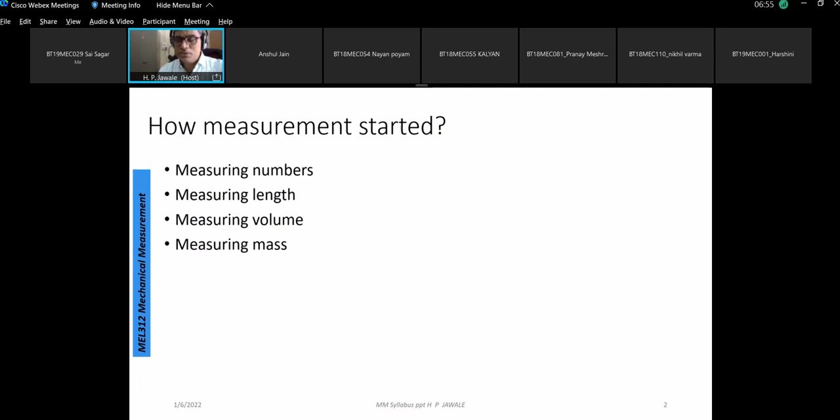Then this way, we found that we have started using measurement. It was a need of time that without measurement we could not proceed further for knowing the contents of a system. Then we slowly started measuring area - area of our farm, area of a particular land, area of elements like paper, area of a table. So slowly we moved further.

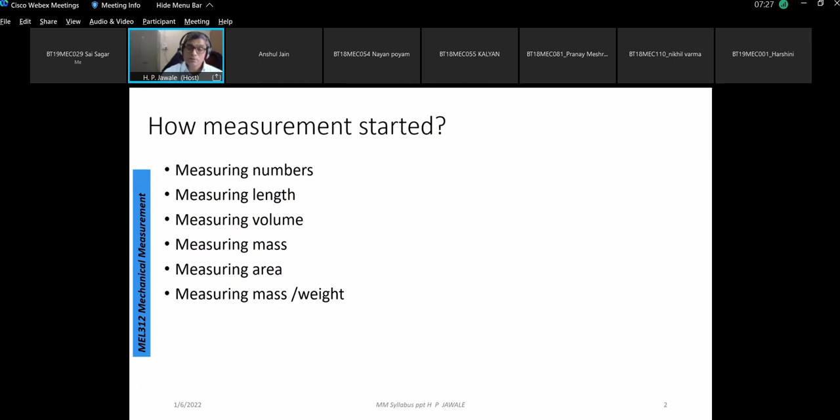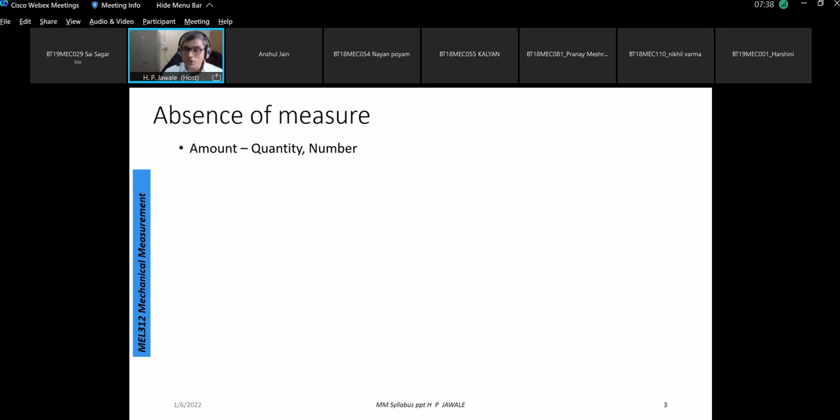Science of measurement has a long history. Then we started measuring mass and weight. Now in this way, when we have started measurement, we can find what will happen if there is no measurement possible. We will not be able to quantify. We will not be able to give something in terms of number. So we will not be able to say that it is a 5 number.

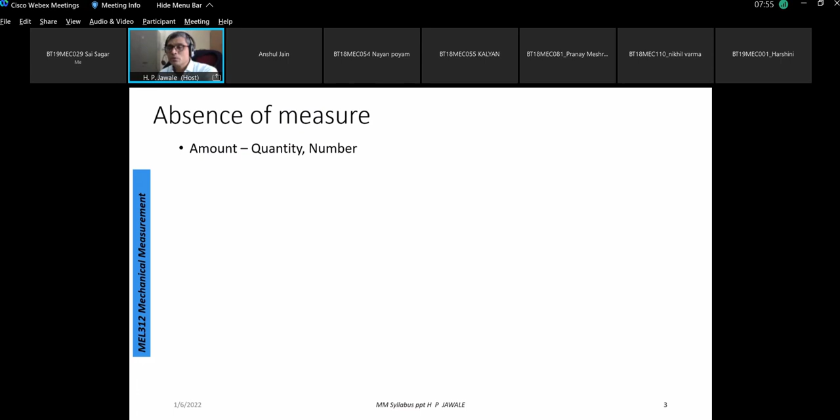There are 80 students in 2 classes. So we can just imagine that without measurement, or in the absence of measurement, we will not be able to quantify. We will not be able to assign numbers to an entity. So without amount and measure, we will not come to know what is the status of the system.

The very first slide we discussed was a very general slide. It had some background of history long back, before there were standards established. But now, as of today, we have calibrated standards available with very fixed units for measurement. So if we don't have measurement of a mechanical system property, we won't be able to

quantify what is the temperature of the filament. Then we'll have to express that the filament is hot or cold. We'll have to express that voltage is high or low. We'll have to say that the pressure measurement device is for low pressure or high pressure. So there will be some low, high - just qualitative measurement of entities. Whereas now we must know the quantity. Quantitative measurement is required.

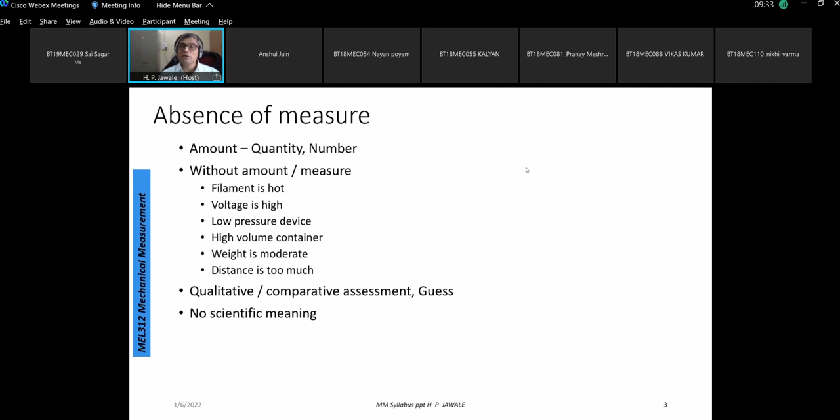So actually we would get the assessment by guess only, if there is no measurement. The meaning will be lost - there will be no scientific meaning to the entities. If I say the filament is hot or cold, it will have no scientific meaning. It will just be layman's language, like saying today is too cold or too hot. It will have no meaning, especially in terms of science, engineering and technology, for controlling different processes and elements.

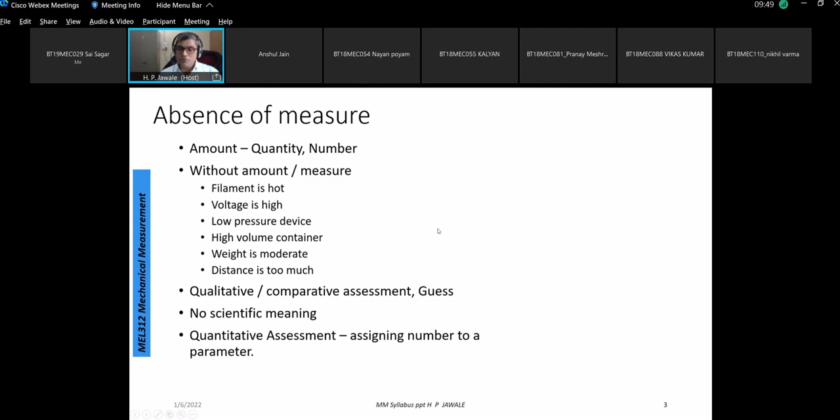So the quantitative assessment of an entity is very important, very essential - it assigns a number to the parameter. So what is measurement? We discussed earlier that measurement is nothing but a process. What we have done is compare - for example, the distance traveled by a person. He will measure that in terms of feet, distance 5 feet or 5 arm lengths, like that. It is the act of comparing. We have an entity to measure, and then we compare.

For example, there is ice.

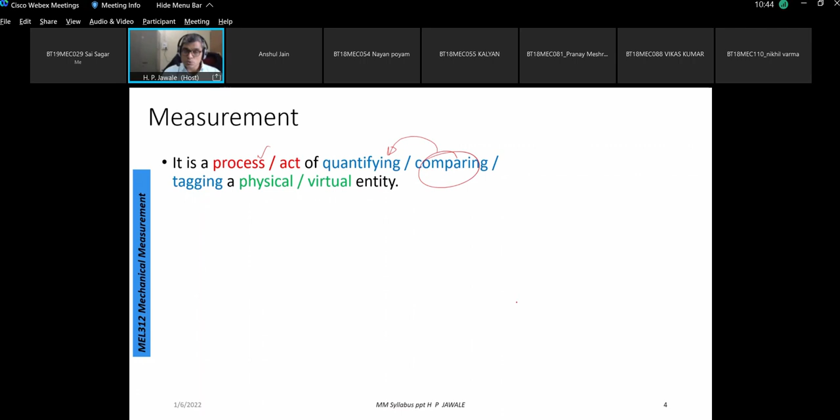We will say that the temperature is very near to the temperature of ice. What is that? It is nothing but a process or act of comparing. So we are going to compare this. It is a process of comparing, and more scientifically we can call it quantifying. We are quantifying in terms of number, so there is some value, which is very important. Tagging a physical or virtual entity, that is value. Assigning value is important. So what we have done is compare, and we have assigned some value to it.

The distance is 5 feet distance. Distance is 10 arm or 10 hand distance. The diameter of the board, the diameter of the well is say 10 hand, or depth is say 10 feet depth. A very rough unit, may be rough, but what we have done remains the same from age long. We are going to compare. We are going to have the entity being tagged with the numbers.

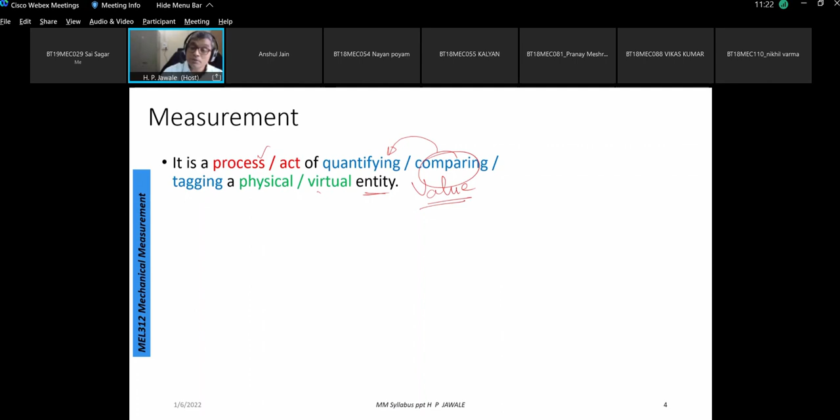So this entity can be a physical object. For example, there are now 117 students in the class. So what I have done is assigned the number 117. As of right now, the number of students or participants present in the meeting is 117. So the same thing can be very scientifically told, it can be any entity. For example, number of electrons in an atom.

The entity can next be the property. So what are the different properties of material? We have got yield strength, we have got tensile strength, we have got Young's modulus. There are different elements, different properties which we are going to define. Say temperature is there, pressure, volume, and so on. So there can be a number of properties there.

Or more specifically, in today's context, we have the process parameters. Many of the processes are to be controlled. For example, there is a flow of water into the boiler, say 1000 cubic meters per hour. Some unit is assigned as a scientific measurement for the process parameter. Say the amount of fuel consumed by a particular boiler, or by your two-wheeler or four-wheeler, in terms of liters per kilometer or something. So it is nothing but the process of combustion of the fuel or obtaining power. So what we have done is define that.

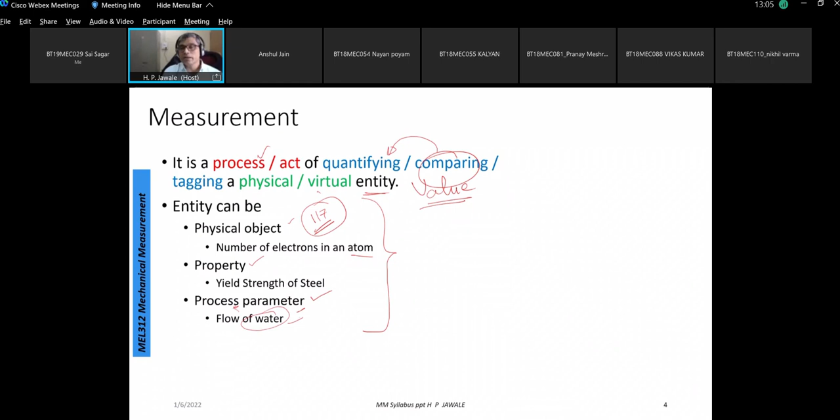So the status of the measurement - for example, if you consider any scientific phenomena in science, we find that it has progressed because of measurement. More and more accurate measurements are possible for time, length, distances, mass, and so on. Because of this progress in science, we are able to measure everything correctly, even the distance between two stars or the difference between two elements in space. So all the laws which are established in scientific phenomena involve some numerical parameters, and those are well supported by means of measurement.

There are various measurement methods, various measurement instruments that we have generated or created. So all the laws that are established have involved various parameters. You can take the example of your IC engine. Suppose you want to conduct a test, you have to go for different measurements. So all kinds of measurement into the phenomena or the law which is there for combustion or so on, it has been established, and more accuracy is obtained through measurement.

So as measurement is improved or developed further, the science has advanced further, and we find more and more scientific laws are being tested, validated, and so on for better accuracy, better reliability, and so on.

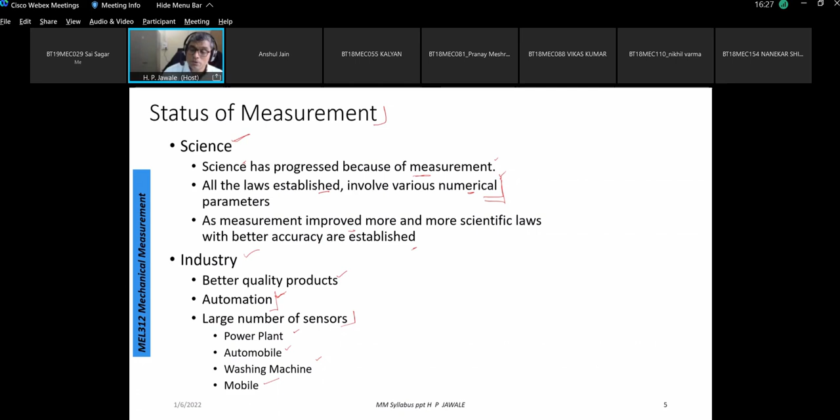Take the example of power plants, or your two-wheelers and four-wheelers. In the four-wheeler, you have got different sensors mounted, for example for opening of the airbag. Take the example of household elements like washing machines, food processors, refrigerators, televisions, and even mobiles, which have different sensors. These sensors help in taking measurements, which are used not only in scientific areas but also in industries.

So mechanical measurement is about measuring mechanical parameters. If you have heard of electrical measurement, there are different entities in electrical engineering which require measurement and accurate prediction of status. Similarly, in the mechanical domain, properties like displacement, velocity, acceleration, speed, force, torque, power, pressure, and so on are required to be measured, not only for knowing the state but also for helping control the processes further.

Instrumentation mainly deals with signal processing. It's not only the science where we tag the entity, but it's a complete system in which the status is made known, compared with some standard, and then assigned some number. Even that time-dependent assignment of the value is taken and used for further application. That is done through signal processing.

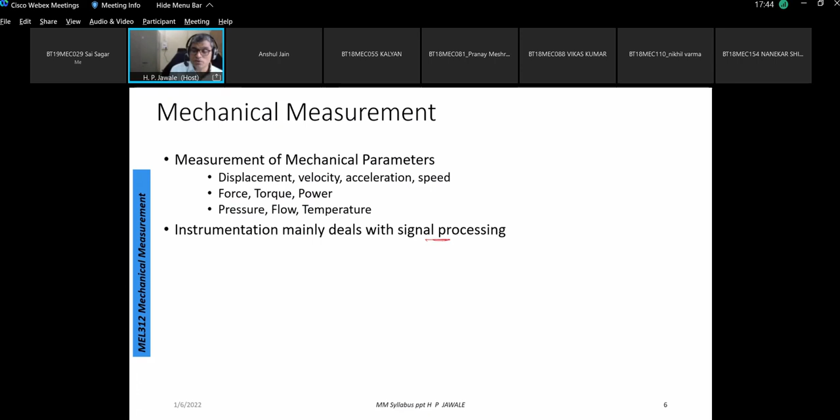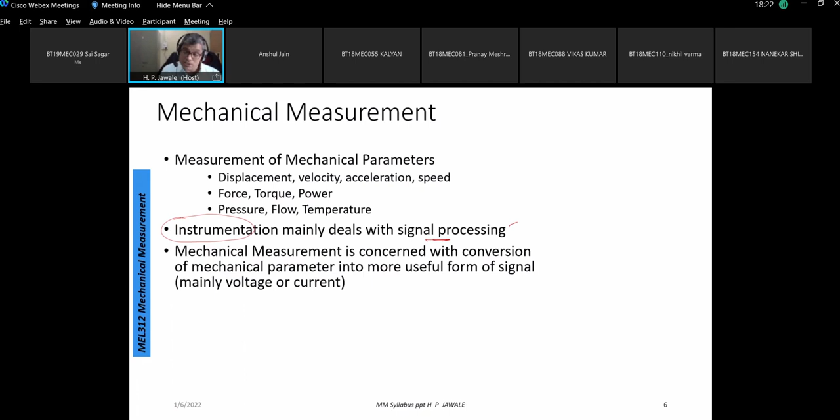We are going to process the signal because we will never get signals in the final usable format, so we need instruments for this. Instrumentation mainly deals with processing the signal and converting it into a useful format. Mechanical measurement is concerned with converting parameters used in the mechanical domain into a more useful form of signal, maybe voltage, current, or some other way that is easy to express in useful numbers.

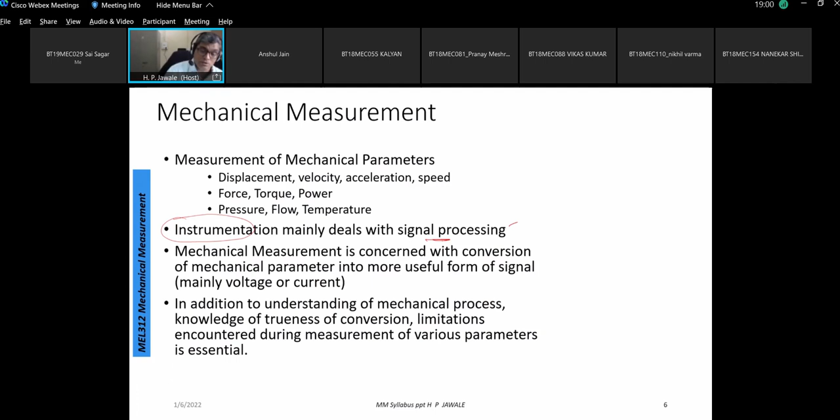In addition, we need to understand the mechanical processes. Knowledge of the trueness of converting one entity or one format of information to another is also important in the measurement of various parameters. So mechanical measurement takes care of properly understanding the mechanical process, how signals are converted from one form to another, and how those are converted into quantification, or how a number is tagged to a particular entity. So we need to learn that particular element.

So actually what we are going to learn in this subject is the fundamentals of instrumentation: what are the main components of the instrument, what are the main components of the measurement system, what is the overall mechanical measurement system, and what are the different parts and elements which make the structure of the instrument or the mechanical measurement system.

What are the important components in terms of the reliability of the conversion and reliability of the reading of the entity - that is nothing but accuracy analysis, or error analysis. Then we try to eliminate that error or maintain it within acceptable limits. So we actually go for errors and calibration of the instrument or mechanical measurement system. That is what we are going to see primarily in this subject.

We will only learn the fundamental principles, whereas this is a very vast domain with different components being developed, which are mainly of an interdisciplinary nature, involving different sensors from different domains like electronics, and even processing in terms of programming languages and other elements.

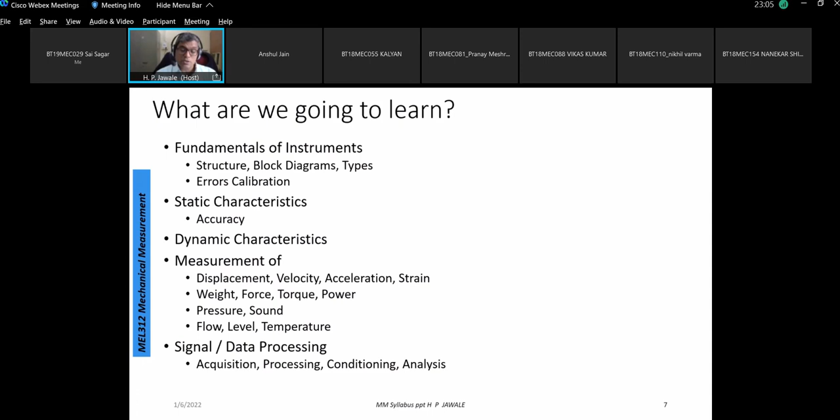Then the most important part of the mechanical measurement systems is signal processing. Earlier the name of this subject was measurements and signal processing, so we used to take this part prominently. But now the name of the subject has changed and the syllabus also is revised. We are very rarely going to deal with signal processing, but let us understand what is the importance of signal processing.

Say once the signal is obtained from some system, which is required for controlling the process, that needs to be further used for having some control. For example, we acquire the signal, we take the signals, we have the status of the system. Say temperature of some system is known, or within some confined boundary it is known. And if we find it has some comparison with the set standard, if it reaches above the set limit, then we need to do some action.

So for taking the action, we need to control the process with which that temperature is generated. So we need to acquire that information of the present status, for example temperature is an entity. Then after having it, we need to process it, convert it into the proper format, condition it. If there are some unwanted elements entered into the signal, we need to remove those, then analyze, further compare, and give some instruction for controlling the process. So signal and data processing becomes very, very important as far as process control is concerned.

Though we may not see this in this subject, you should understand that not only tagging or quantifying the system in terms of number is important, but also controlling the process is required, which is only achieved by having the signal and data processing. So we need to present that data then.

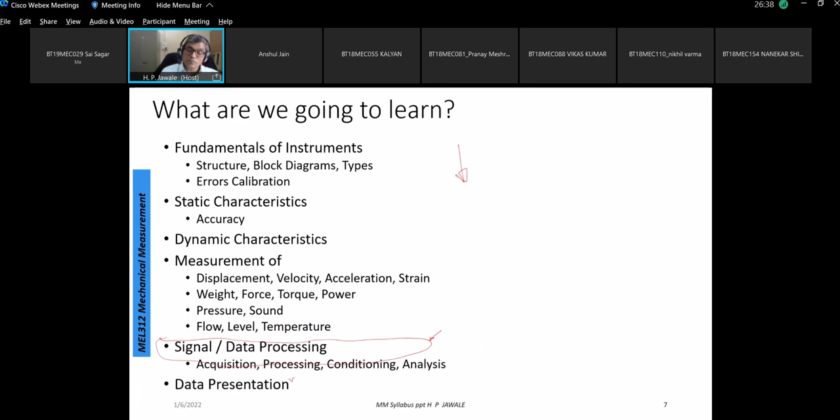So this is what we are going to learn in short. Let us discuss the syllabus. Part A of the syllabus that I will be dealing with...

is about the general principles of the measurement system, why the systems and how the systems are going to work, how the performance of the measurement system is achieved, and what are the different parameters for performance of the mechanical measurement system that we are going to study.

Then we are also going to see the structure. What is the measurement system? What are the various different elements into the measurement systems? What are the different examples of the measurement system? And the basic block diagram of a system.

Then we are going to find the characteristics of the measurement system, especially the static characteristics. We will identify the different static characteristics, see the definitions, see how those can be achieved, and some numerical part will also be there, which is going to lead to establishment of certain acceptable standards.

That is nothing but calibration. So we are also going to learn what calibration is, how it is done, why it is done, and how that is maintained after periodic usage of the instrument, how we are going to calibrate that.

Then some basics regarding the dynamic characteristics of the system, response of the system to different dynamic situations. Then the errors, the deviation of the system from the ideal or desired performance level to something that, because of different sources, we find is going to degrade.

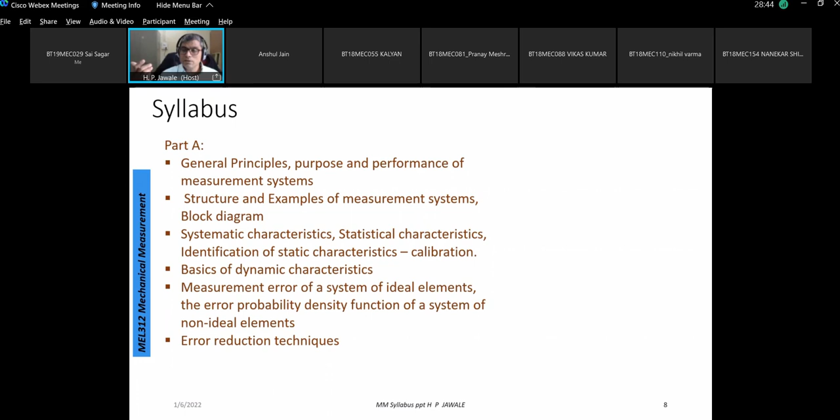So the measurement system errors - we are going to study what are the different kinds of error, what are the different reasons for these errors, and how those can be eliminated. So the ideal elements in error, the probability density function of the system for non-ideal elements, and what are the different methods for reduction of error that we are going to study.

Part B basically will be dealt with by Dr. Thakre. He'll be dealing majorly with elements of the measurement system - the different classification, principle, construction, range, the operating principles, and the different working principles.

For example, for the same entity being measured, there can be a number of different principles on which the measurement system will be based. So the particulars of those, how one system is better, or one measurement technique has some merits and demerits over the other, everything will be discussed here, especially in relation with the different entities.

Those entities will be displacement measurement, force measurement, speed measurement, torque measurement, flow measurement, level, pressure, sound and light measurement. This is a very major part that we will be considering.

I already told you that in the earlier syllabus or earlier subject, where it was MSP - mechanical measurement and signal processing - we used to teach this. So it's very rare that we'll be able to cover this, but let us see that this part will also be important for you to understand.

We may or may not cover this, but sometime if possible, you can go through different textbooks for the signal processing part - what are the different sensing elements, what are the types of signal processing and conditioning elements, data acquisition, different digital and analog techniques in mechanical measurement, what are the different readouts, and how the element of information stored is analyzed and presented.

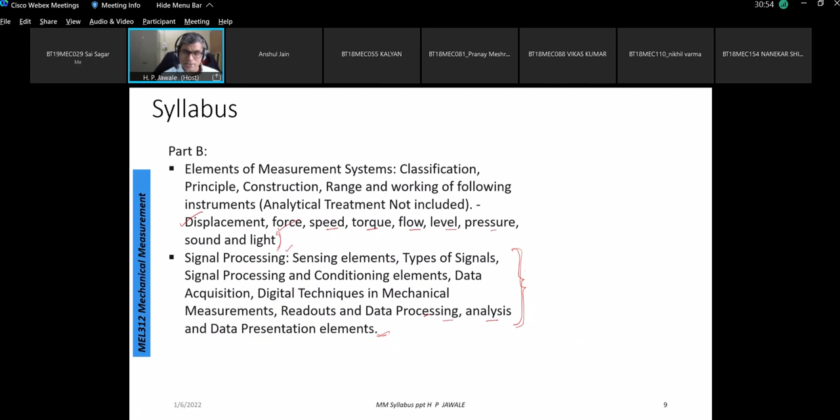Then the book which we are going to follow is Mechanical Measurement Systems by E.O. Doebelin - Application and Design. I think this book is available in PDF format on internet resources, so you are required to download this, and for your information you can put that on the group even.

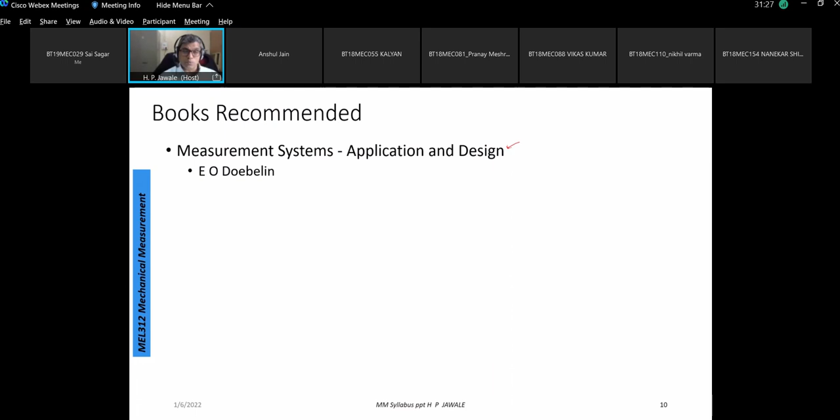The second book we will be using is Mechanical Measurement by Beckwith Buck, Instrumentation, Measurement and Analysis by Nakra and Chaudhary. Many times we take numericals from this supporting text. For numerical analysis for different systems, we also refer to the book Measurement by Doebelin. This is an Indian edition covering the syllabus properly.

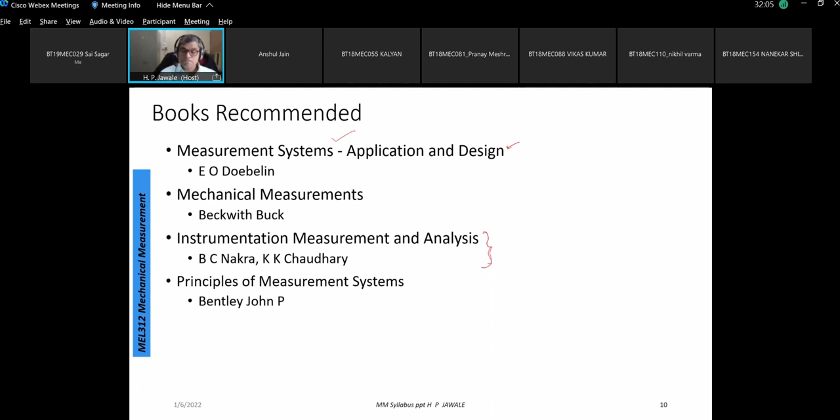One more book we will use is Principle of Measurement by John Bentley. The teaching plan will require minimum 33 classes, plus extras as and when required. Roughly, part A will have 20 lectures, and part B, which is the teaching plan for my part of the syllabus and Dr. Thakre's syllabus, will be distributed around 20 classes each.

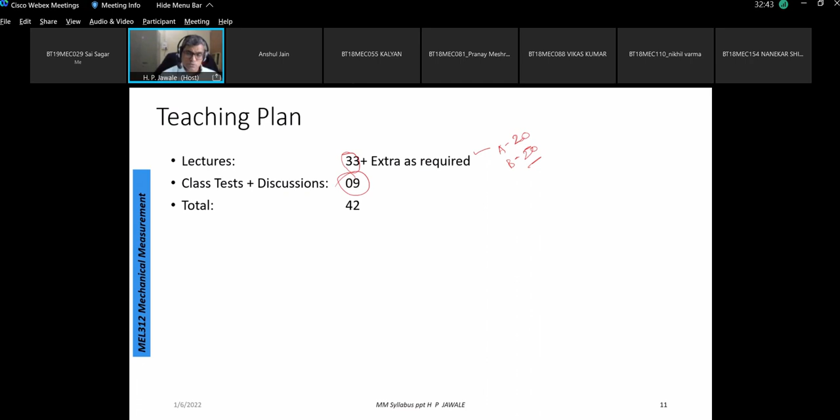There will be some class tests and some discussions, so as and when required we will use these. Extra classes, as I already told you, will be planned as and when required.

Now, evaluation plan for part A and part B together: the end semester examination, in online mode, will be of 35 marks. Sessional 1 or mid-sessional will be of 25 marks. Class test, actually this is something wrong, it will be 40 marks. Part A will have 20 marks internal evaluation, and part B will have another 20 marks of evaluation.

If I am teaching part A, the mid-sessional syllabus from part A will be evaluated for 25 marks in the mid-semester examination, as well as 5 marks worth of questions will appear on part A in the end semester examination. The remaining 30 marks of the paper will be from part B.

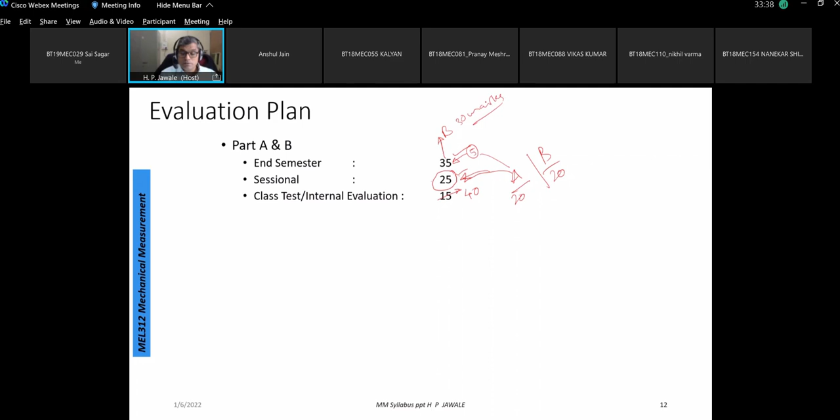The exam will be an open book examination. Since it is online, all questions will be compulsory, of question-answer type: short answer, numerical, and sketch of the instrument.

For end semester, I think this is something wrong, this was with the old offline format. Now I think end semester is 1.5 hours, I need to modify this. The sessional, mid-sessional examination will be of 1 hour.

Regarding paper size: for at least my part, part A, I will restrict the number of pages. It will be A4 size sheets, and instructions on the number of pages to be used will be given to you before the examination.

Now, about class tests: there will be a quiz. Though it is called a class test, it will be kind of a quiz based on part A. I am not aware about part B, but that will be taken care of for internal assessment, part A out of 20 marks, part B out of 20 marks.

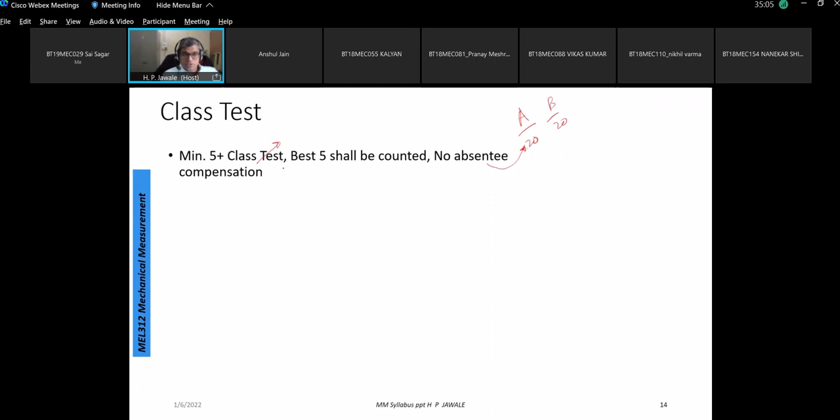I am planning to have some kind of quiz or class test for this 20 marks. There will be some number of class tests or quizzes, and the best among them will be considered. Say there are 6 or 7 tests, the best 5 will be considered and converted into 20 marks. If required, we will also have a viva.

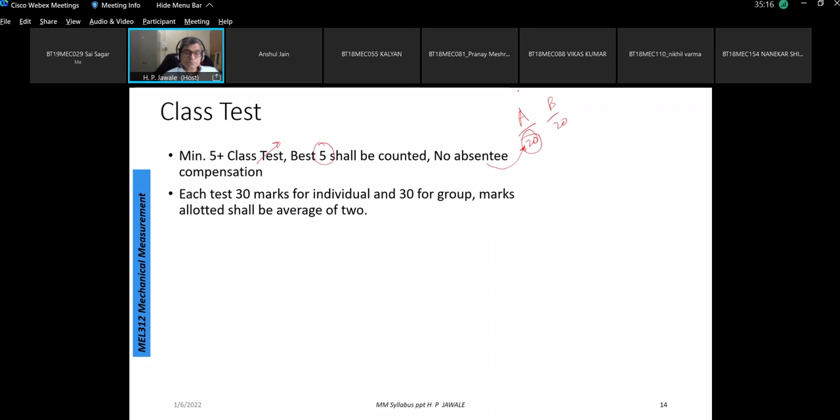I think we need not worry about this at this point of time, but for sure you must know that it will be of negative marking type. So class tests will be of negative marking type.